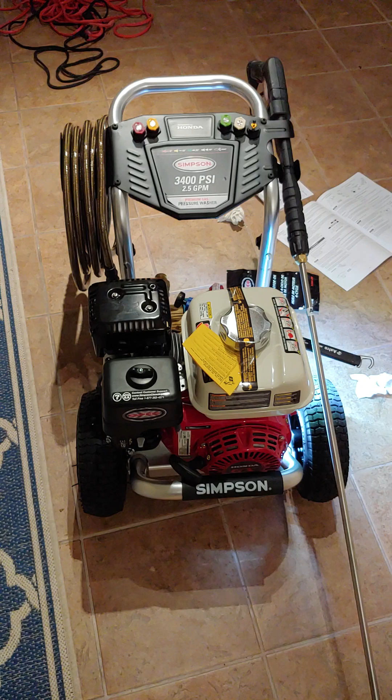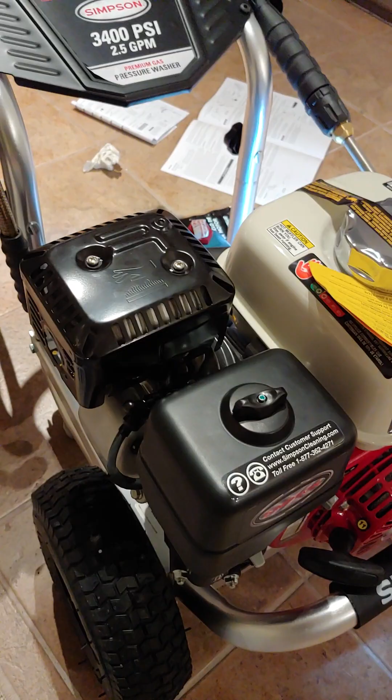First issue is, does it come with enough oil? The answer is kind of no, it doesn't. It says right here in the Honda Owner's Manual that the engine oil capacity for this GX200 engine, which is what I have, is 0.6 liters. Look at the bag. The bag of oil they give you says 473 milliliters, or 0.473 liters. So no, there's not enough oil in this bag.

To fill the engine, that would be if the engine is completely empty, and I don't think they completely drain every drop of oil out of this thing. Either that, or this Honda spec is wrong, because when I put this bag of oil in, it was the perfect amount. It was exactly right, even though it's not the spec for a completely empty engine. It apparently is the perfect amount for this brand new pressure washer when you buy it. So you just basically open up the oil dipstick tube and put this bag of oil in, every drop. And I'm telling you, it's the perfect amount. You couldn't put one more drop of oil in this engine.

Now the next question is, how do you check the oil? That's really interesting, because I read about one guy who said you don't put the dipstick in and screw it in, you just push the dipstick in the hole and check the oil. And I thought, well, that's the most absurd thing I've ever heard, this guy doesn't know what he's doing. But it turns out he was right.

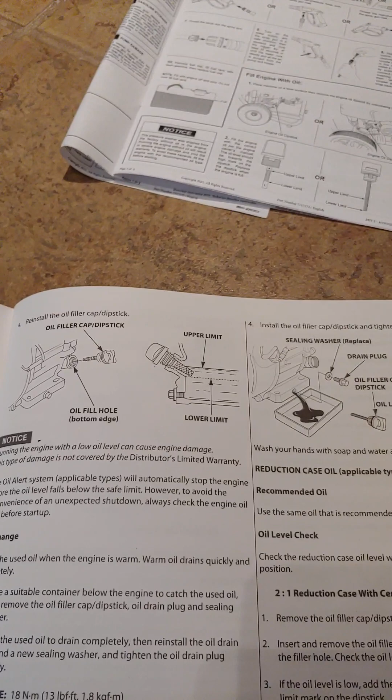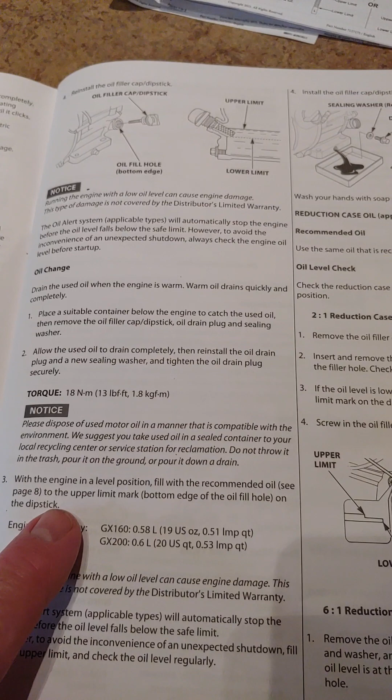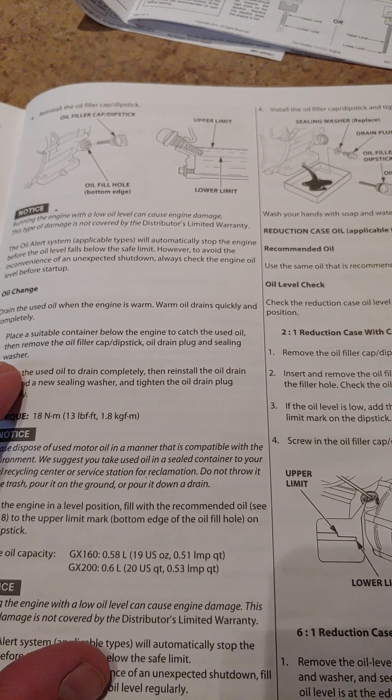It says right here... where is it? With the engine in the level position, fill with the recommended oil to the upper limit mark, which is the bottom edge of the oil fill hole. I'm sorry, I thought it was right here that it said it.

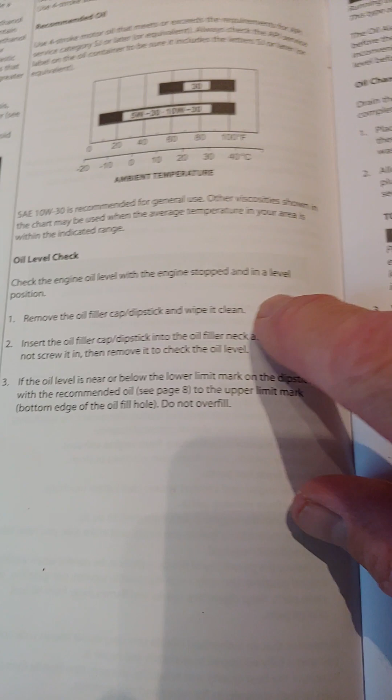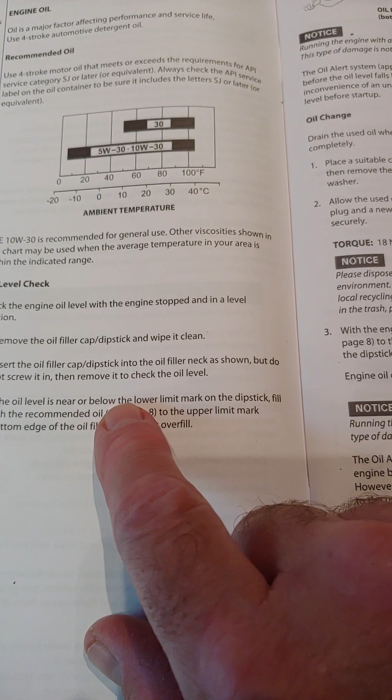Here we go, oil level check. Remove the oil filler cap, wipe it clean, insert the oil fill cap/dipstick into the engine oil filler neck as shown, but do not screw it in. Then remove it to check the oil level. If the oil's right, whatever. So he's right, you don't do that.

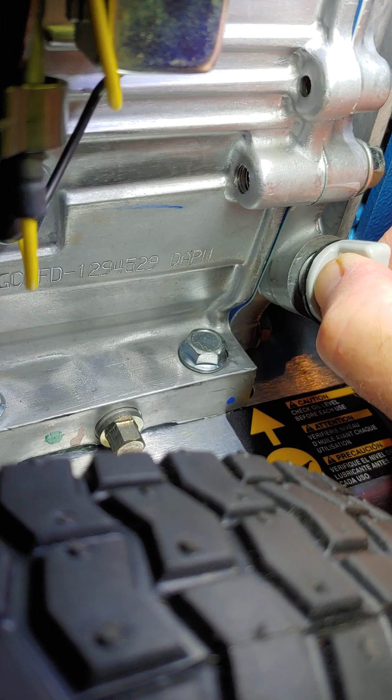You just basically take the dipstick, line it up with the hole, push it in till it's flush, pull it back out, and check it. Because the dipstick is going to be on an angle, you're going to have... I dripped on my towel. You're going to have oil at a little bit of an angle. But in my case, with this thing completely full, the amount of oil on the dipstick was up to right here. There's an angled line right there. That's about the 3/4 mark on this stick, and it's kind of angled from 3/4 to 7/8 or something like that.

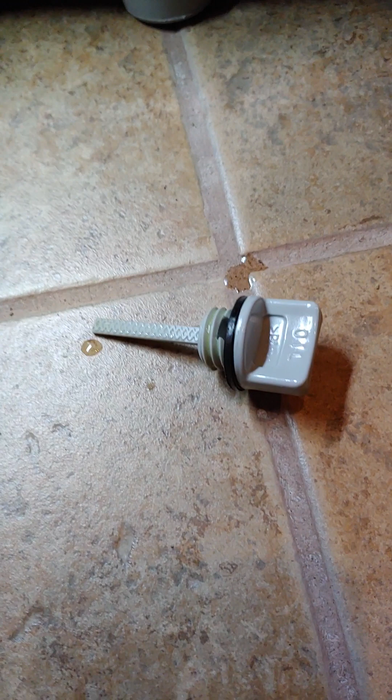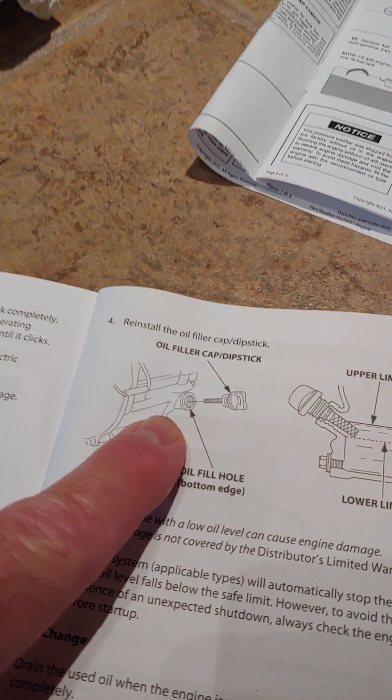So kudos to the guy that said you don't check this the traditional way, you just stick the dipstick in but don't screw it in. He was right. And I don't even know why they bother with a dipstick, because when they say you're supposed to fill it to that position, that is also basically to the upper limit mark on the dipstick, which is the bottom edge of the oil fill hole on the dipstick. And when you look at the bottom edge of the oil fill hole in their diagram, it is basically the bottom of the threaded hole.

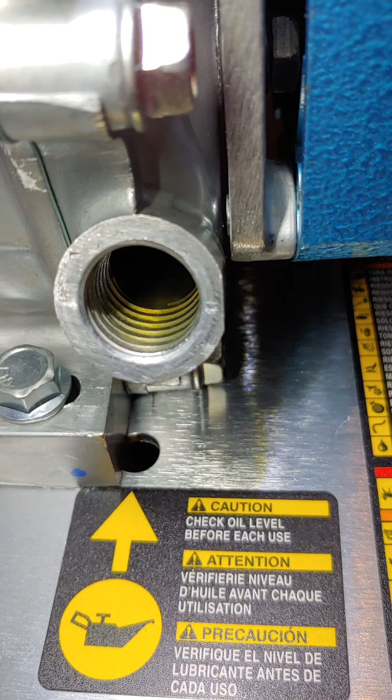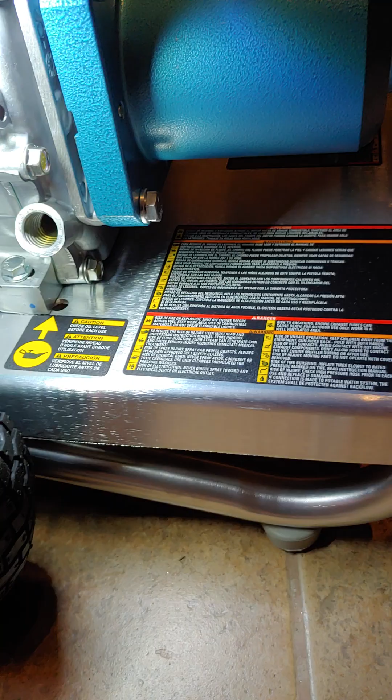So with the amount of oil that came from Simpson, look at there, the oil's all the way up practically to the last thread. I don't think you could put 10 more drops of oil in this motor without it dripping out. So they did include the correct amount of oil. Way to go, Simpson. And the guy was right about how you check the oil, you just stick it in until you bottom it out without threading the stick in. But like I said, why even bother to do it that way? Because all you have to do is just fill it up till it's ready to run out, and that's the correct amount.

And if the dipstick is removed from the hole, you couldn't overfill it if you tried, because any amount higher than this would run out. So if you don't want to mess with the dipstick, or your eyes aren't that good and you can't see it, just fill her up until it's about ready to run out and you're good. So that covers whether or not it came with enough oil. Yes, it did, even though it kind of makes you think that it didn't.

That's how you check the oil. And then the last thing I have to complain about or talk about is the throttle. And I got two things for you there. The first is, how much throttle do you give it when you're starting the engine?

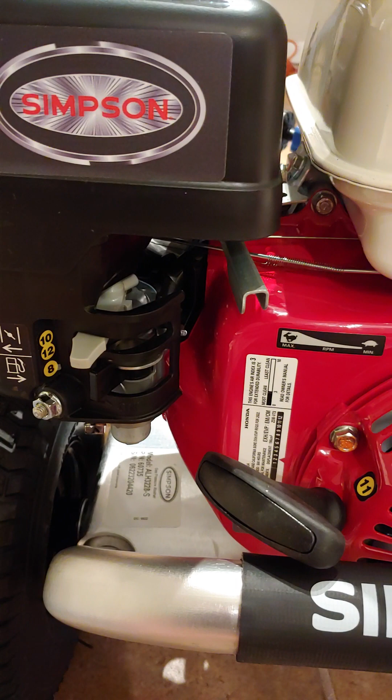Well, according to the owner's manual, 1/3. You give it 1/3 throttle from the minimum. So 1/3 throttle, that's where you're supposed to start the thing. And then once it's running, then you can adjust it as desired.

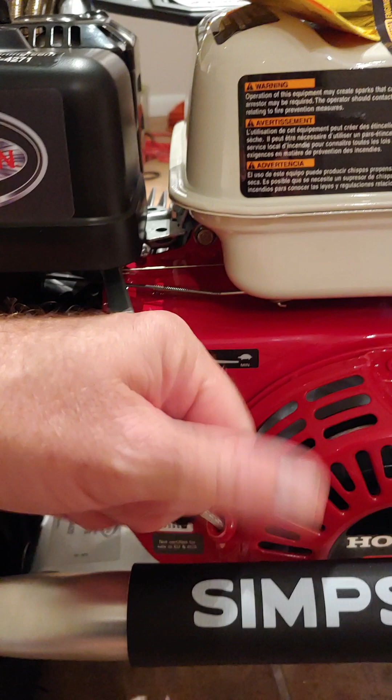The other thing that I don't like about this is, one guy complained that you could rip your hand open when you tried to start the engine on the throttle thing, and he's kind of right. That's not the dullest throttle lever. It's got a little bit of a rolled but sharp edge. And if you're kind of careless, yeah, you could rip the back of your knuckles on that thing a little bit, sure. I think that maybe they could stand to put a better throttle lever on there, and Honda could do an improved job there.

The other thing that I really don't like is it is stiff. I can do it with one hand, but it's not fun, and you can't really control where it ends up because it's so stiff to move it. Maybe that thing will break in. Maybe I need to give it a shot of WD-40. I don't know.

But that's kind of not the quality I would have expected from Honda. I would have thought this thing would be kind of buttery smooth and yet work perfect, and it's not buttery smooth. So Honda, maybe you can work on a little bit of an improvement with that.

This is the top linkage that you're actually moving when you move the throttle, and it looks like it's sealed and marked with some kind of blue tape or blue paint to indicate it was torqued correctly, I'm sure. But whatever, that thing is pretty stiff, Honda. You could do better, and you could also do better by either shortening this a little tiny bit or putting a cap that was plastic or rubber and had a bigger ability to grab onto. Maybe you could move that more fluidly, even with the same amount of torque on the nut.

Plus, not rip your hand open when you try to throttle it. So definitely make sure when you go to start this thing, you kind of preload the thing that far away before you give it a jerk, and then pull, and that will get you clear of it, because you're just taking up the slack to this point. You're not going to start from the very bottom anyway. That's not what they tell you to do. They tell you to pull it until it's tight and then give it a pull, and at that point you're far away from the lever. So if you're doing it right, that won't really be a problem anyway. But I would say that in the hurry of things, you could scratch yourself up a little bit with that, sure. So that could be improved.

That's it. That's all the rumors I can think of that I read about when I researched buying this thing. The stuff that I thought might be a concern.